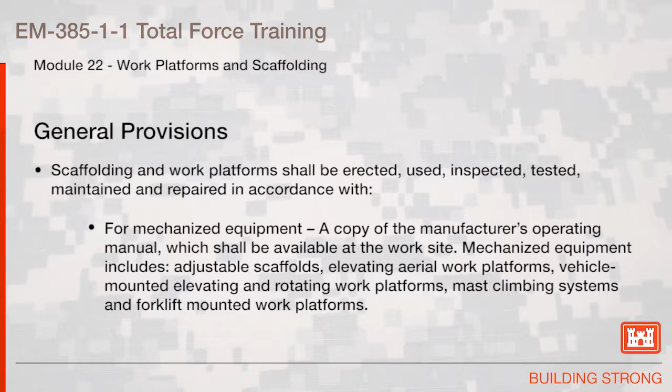The references for this section are EM 385-1-1, Section 22, OSHA 29 CFR 1926.450, Subpart L, UFGS 013526, latest edition, and ANSI ASSE A10.8, 2011 edition.

What is a scaffold? It is an elevated temporary work platform. There are three basic types: supported scaffolds, platforms supported by rigid load-bearing members such as poles, legs, frames, and outriggers; suspended scaffolds, platforms suspended by ropes or other non-rigid overhead support; and aerial lifts such as cherry pickers or boom trucks.

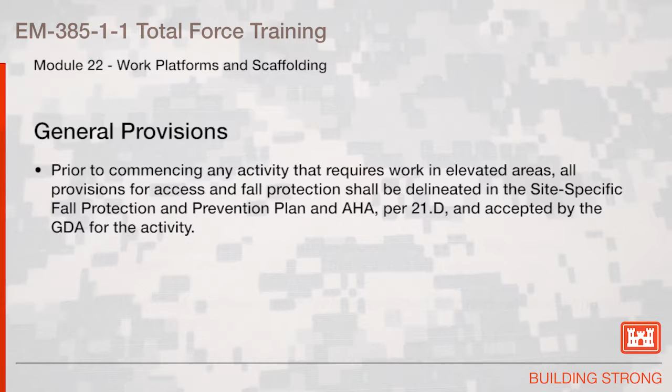General provisions. Prior to commencing any activity that requires work in elevated areas, all provisions for access and fall protection shall be delineated in the site-specific fall protection and prevention plan and the activity hazard analysis per Section 21D, and accepted by the GDA for the activity.

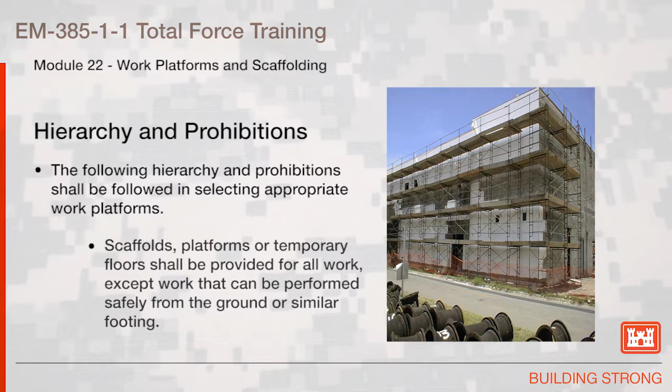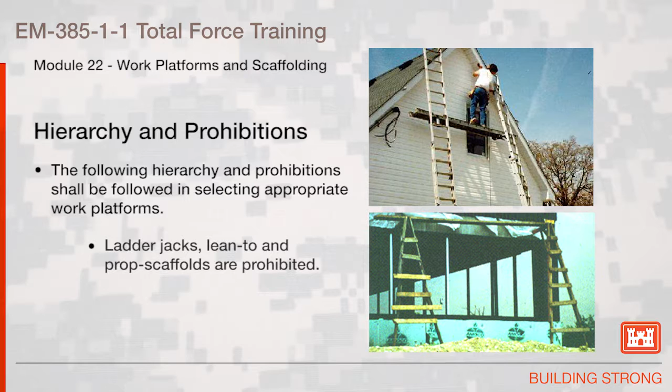Hierarchy and prohibitions. The following hierarchy and prohibitions shall be followed in selecting the appropriate work platforms. Scaffolds, platforms, or temporary floors shall be provided for all work except that which can be performed safely from the ground or similar footing. Ladders may be used as work platforms only when use of small hand tools or handling of light materials is involved. Ladder jacks, lean-to, and prop scaffolds are prohibited.

Emergency descent devices shall not be used as working platforms.

Activity hazard analysis. An AHA shall be prepared by the contractor performing the work and submitted to the GDA prior to erection. The AHA will address all of the following elements: site conditions, i.e. ground conditions, overhead utilities, etc.; identity of the specific type of scaffolding to be used; scaffold dimensions to include height, width, depth, and length; load calculation for the anticipated workload and wind loading; the name of the competent person for scaffolding; and the method of marking or barricading to be used per Section 22.B.18.

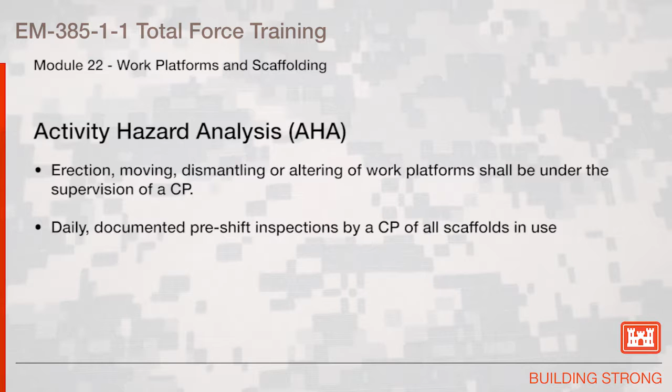The erection, moving, dismantling, or altering of work platforms shall be under the supervision of a competent person, with daily documented pre-shift inspections by a competent person of all scaffolds in use at that time. The competent person shall have a minimum of 8 hours scaffold training covering the specific types of scaffolding used, scaffold base, load calculations, and erection and dismantling.

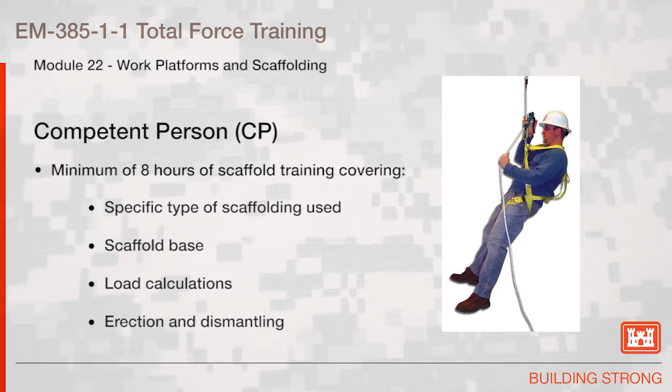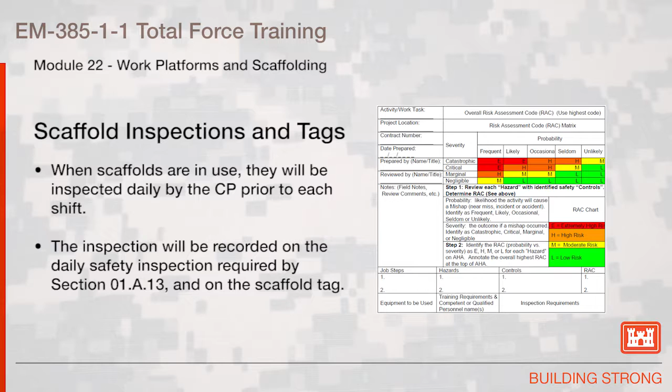Scaffold inspections and tags. When scaffolds are in use, they will be inspected daily by the competent person prior to each shift. The inspection will be recorded on the daily safety inspection required by Section 01A.13 and on the scaffold tag.

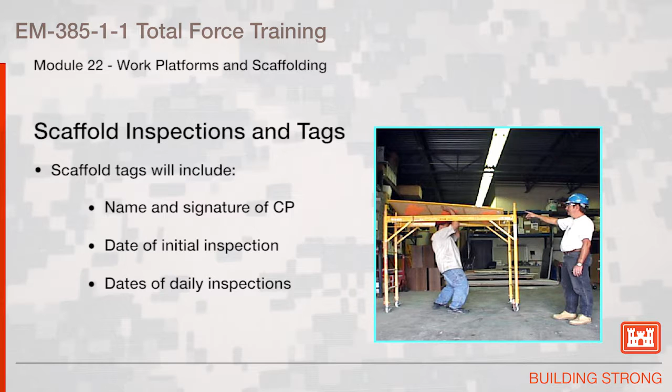Scaffold tags will include the name and signature of the competent person, date of the initial inspection, and dates of the daily inspections, and be visible, legible, and water resistant. They will include wording on whether the scaffold is complete and safe for use, or incomplete and either not ready for use or unsafe.

Scaffolding that has been hoisted after configuration or assembly will be re-inspected by a competent person, both before initial use and after each additional hoisting. This inspection will be documented on the scaffold inspection tag.

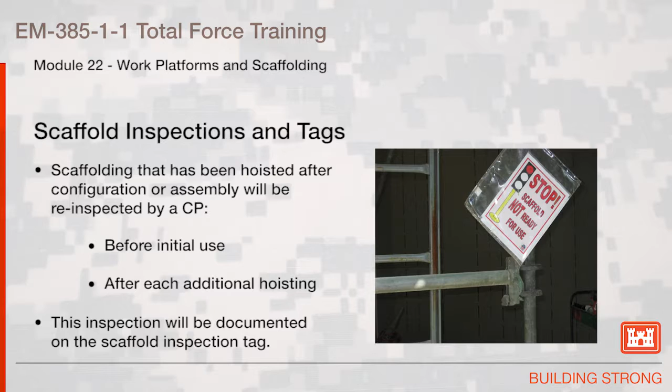Anyone involved in erecting, disassembling, moving, operating, using, repairing, maintaining, or inspecting a scaffold shall be trained by a competent person to recognize any hazards associated with the work in question. Proof of training shall be available upon request.

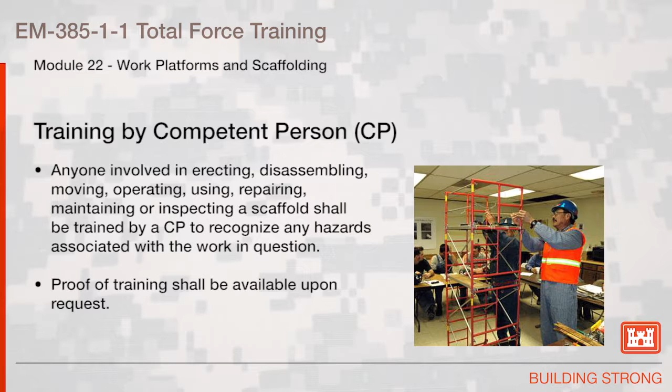Vehicle operations near scaffolds. When vehicles or mobile equipment are used near scaffolding, substantial stop logs or barricades shall be installed. The use of a ground guide is recommended for this equipment. However, if it is demonstrated that barricades are not feasible or are not required based on distance, a ground guide shall be used. Ground guides will not be exposed to potential falling objects. Hanging scaffolds are exempt unless the competent person determines that vehicles and mobile equipment could pose a hazard to safe operation.

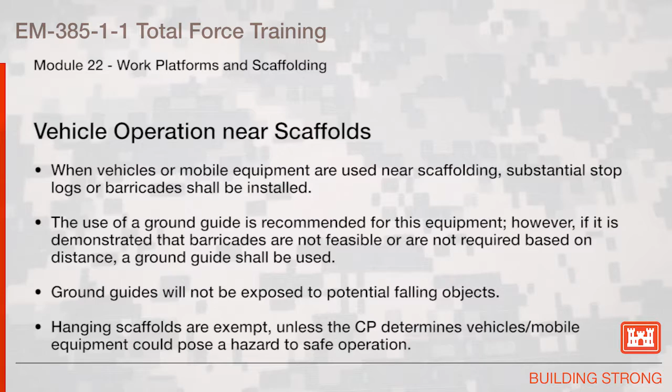Fall protection for erectors and dismantlers of scaffold. For workers erecting and dismantling scaffolds, an evaluation shall be conducted by a competent person for fall protection to determine the feasibility and safety of providing fall protection. If fall protection is not feasible, an AHA detailing a rationale for infeasibility of use of fall protection shall be submitted and accepted by the GDA.

Clearances. Work platforms shall not be erected or used in the immediate vicinity of power lines or electrical conductors until such are insulated, de-energized, or otherwise rendered safe against accidental contact.

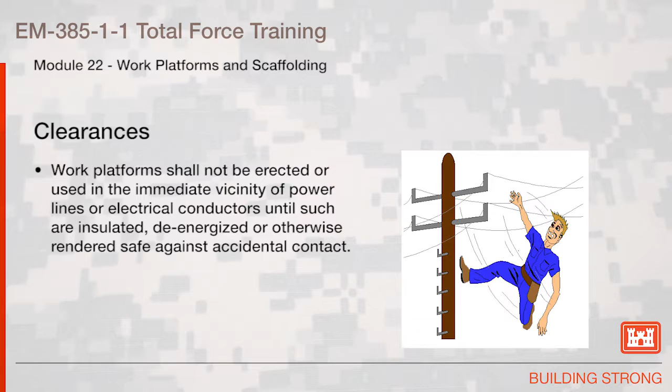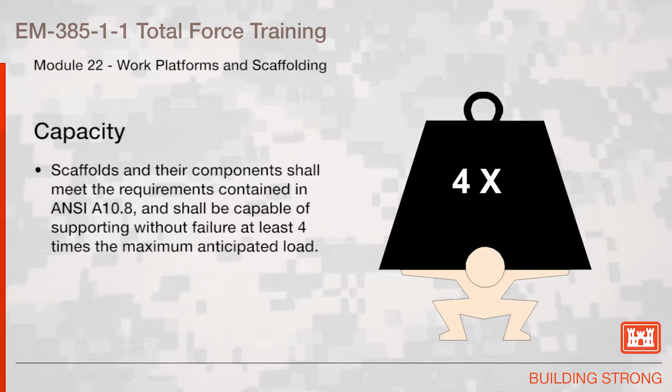Capacity. Scaffolds and their components shall meet the requirements contained in ANSI A10.8 and be capable of supporting without failure at least 4 times the maximum anticipated load. Direct connections to roofs and floors and counterweights used to balance adjustable suspension scaffolds shall be capable of resisting at least 4 times the tipping moment imposed by the scaffold operating at the rated load of the hoist, or 1.5 times minimum the tipping moment imposed by the scaffold operating at the stall load of the hoist, whichever is greater.

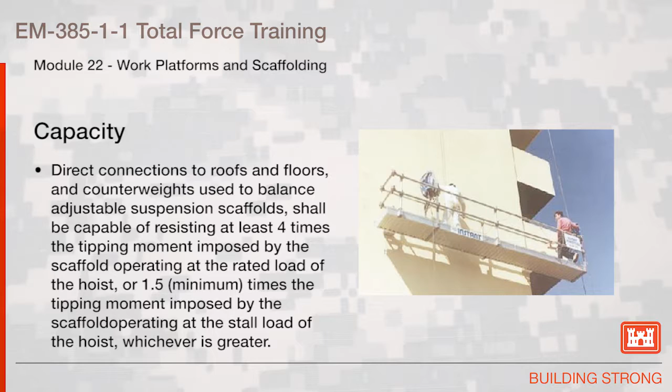Design. Factory fabricated scaffolds and components shall be designed and fabricated in accordance with the applicable ANSI standard. When there is a conflict between the ANSI standard and this manual concerning the design or fabrication of factory fabricated scaffolds, the ANSI standard shall prevail.

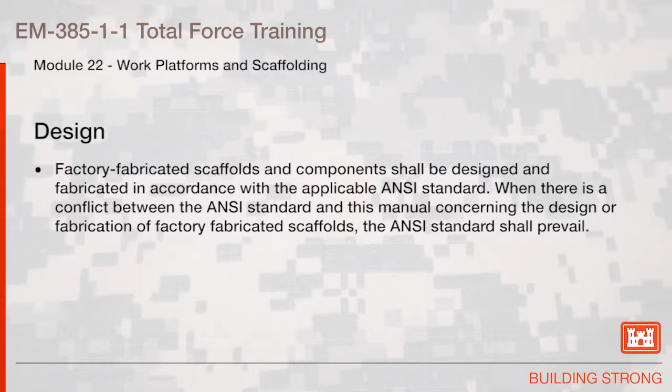When scaffolds are wrapped with tarps, poly enclosures, or similar materials, wind calculations will be calculated by a qualified person to determine the strength and placement of the ties. When scaffolds are to be partially or fully enclosed, a qualified person shall verify the adequacy of the number, the placement, and the strength of ties attaching the scaffold to the structure, taking into consideration wind loads and weather.

Supports. Supporting members and foundations shall be of sufficient size and strength to safely distribute loading. They shall be placed on a firm, smooth foundation that will prevent lateral displacement.

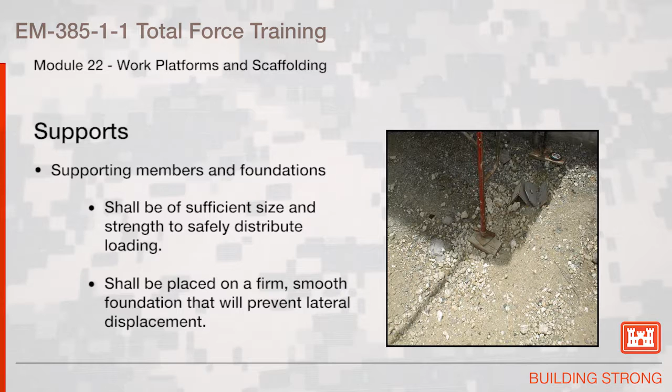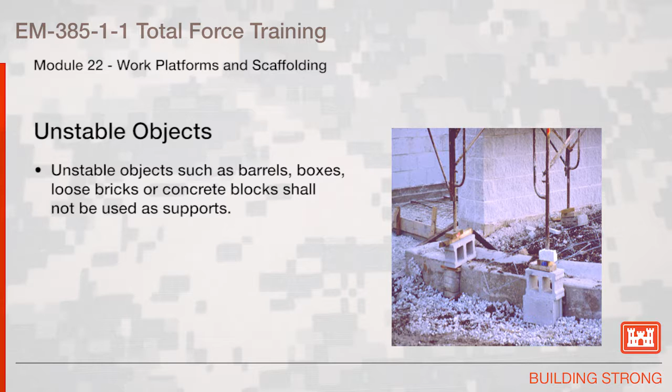Unstable objects. Unstable objects such as barrels, boxes, loose bricks, or concrete blocks shall not be used as supports.

Plumb and braced. Vertical members, i.e. poles, legs, or uprights, shall be plumb and securely braced to prevent swaying or displacement. Scaffolds shall be plumb and level unless designed by a registered professional engineer to contour as the structure does.

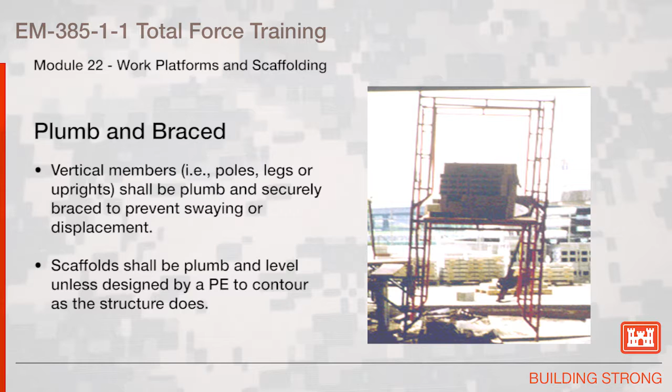Base supports. Scaffolds, other than suspended scaffolds, shall bear on base plates upon mud sills or other adequate foundation.

Planking. Working levels of work platforms shall be fully planked or decked.

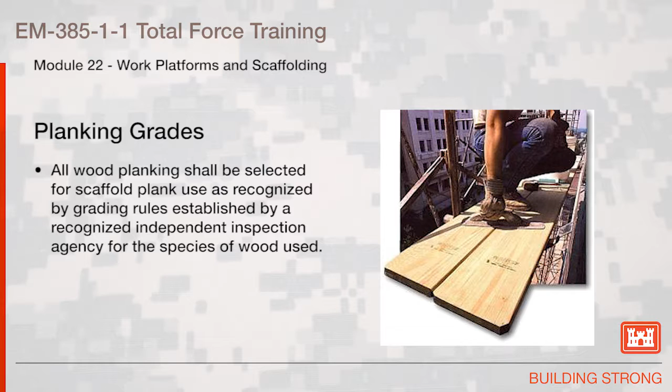Planking grades. All wood planking shall be selected for scaffold plank use as recognized by grading rules established by a recognized independent inspection agency for the species of wood used. Planking. Fabricated planks and platforms may be used in lieu of solid sawn wood planks. Maximum spans for such units shall be as recommended by the manufacturer.

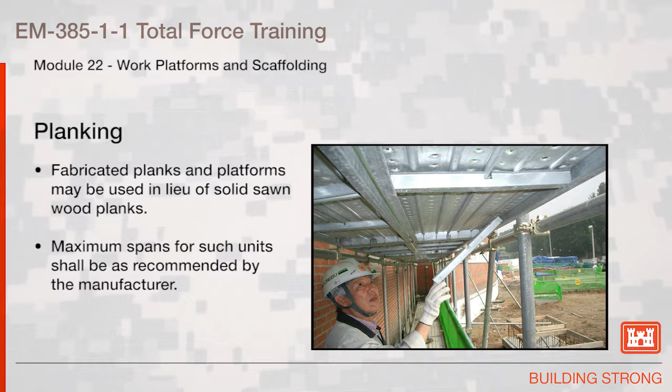Planking shall be secured to prevent loosening, tipping, or displacement, and supported or braced to prevent excessive spring or deflection.

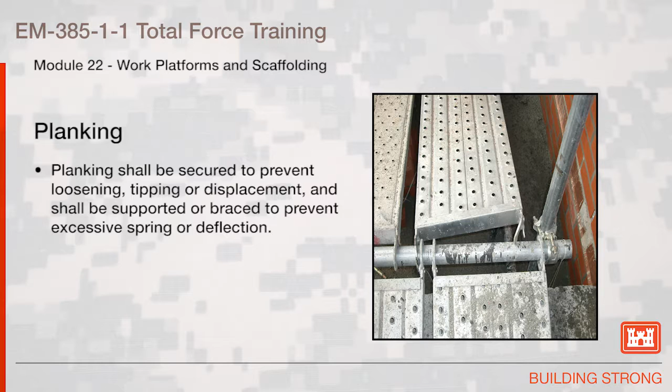Planking overlaps. When planking is lapped in a long run, each plank shall lap its supports by at least 12 inches. Scaffold planks shall extend over their end supports not less than 6 inches unless the planking is manufactured with restraining hooks or equivalent means of preventing movement, nor more than 12 inches.

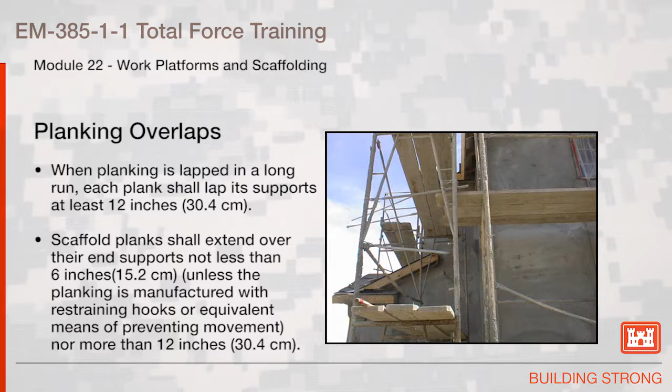Securing platforms. Work surfaces shall be properly lapped or securely fastened to the scaffold.

Platform distances. The front edge of all platforms shall not be more than 14 inches from the face of the work unless guardrail systems are erected along the front edge and/or personal fall arrest systems are used. The maximum distance from the face for plastering and lathing operations is 18 inches.

Access. An access ladder or equivalent safe access shall be provided. Where a built-in ladder is part of a scaffolding system, it shall conform to the requirements for ladders.

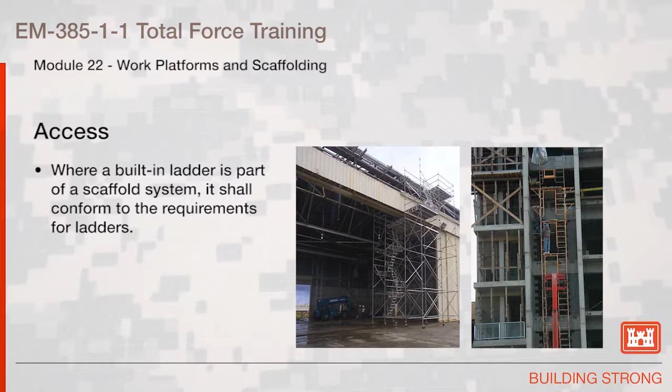Climbing on braces. Climbing of braces shall be prohibited.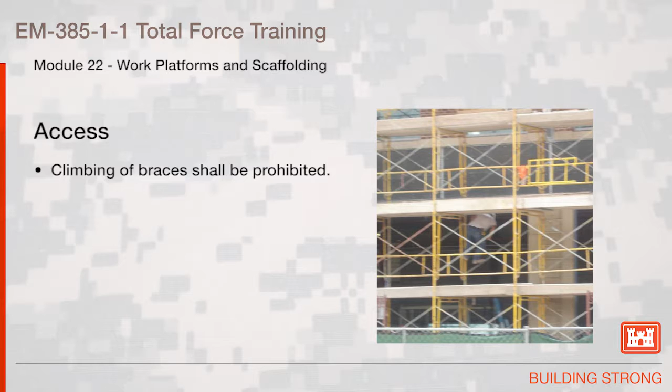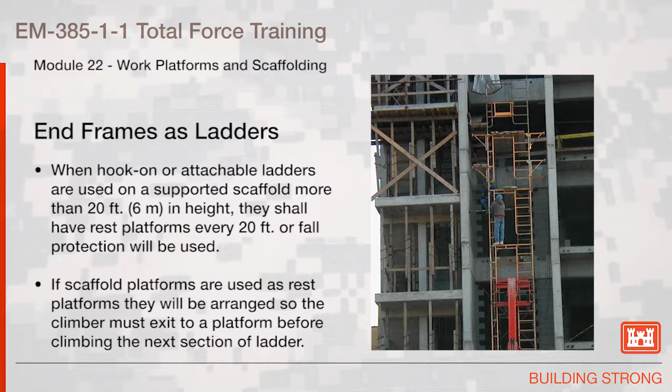End frames used as ladders. When hook-on or attachable ladders are used on a supported scaffold more than 20 feet in height, they shall have rest platforms every 20 feet or fall protection will be used. If scaffold platforms are used as rest platforms, they will be arranged so that the climber must exit to a platform before climbing the next section of the ladder. When end frames are used for access, they will conform to the ladder standard and not exceed 20 feet without fall protection.

Access gates. Ladder access points shall be protected by an inward swinging gate or chain guard.

Other authorized scaffolds. The use of the following types of scaffolding are permitted if they are designed and constructed in accordance with ANSI A10.8.

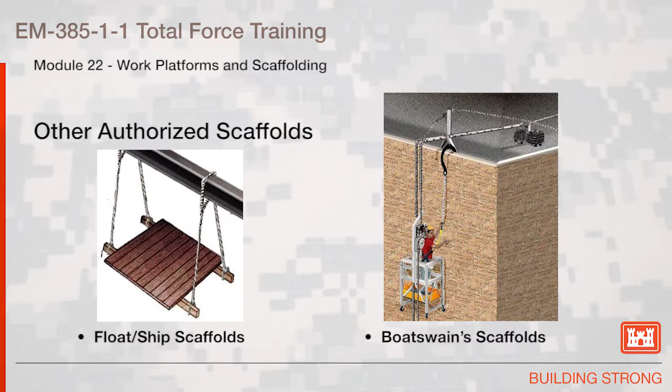Illustrated here is a float or ship scaffold and a boatswain's scaffold, window jack scaffolds, carpenter's bracket scaffolds, and form scaffolds.

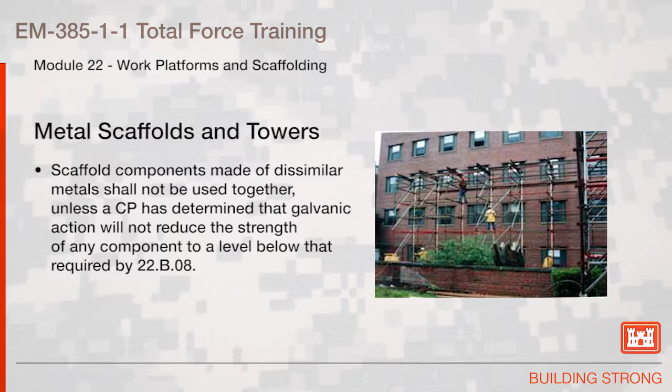Metal scaffolds and towers: scaffold components made of dissimilar metals shall not be used together unless a competent person has determined that the galvanic action will not reduce the strength of any component to a level below that required by section 22B.08.

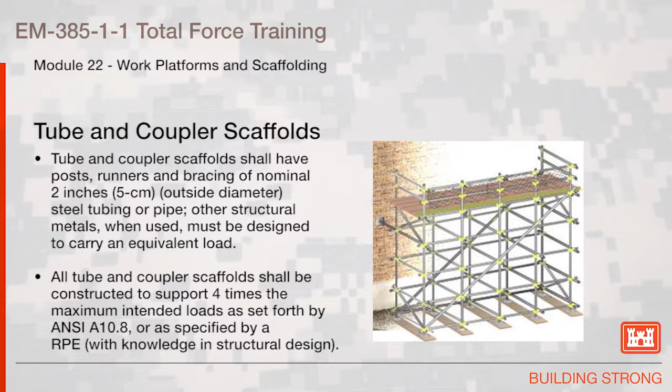Tube and coupler scaffolds shall have posts, runners, and bracing of outside nominal 2-inch outside diameter steel tubing or pipe. Other structural metals, when used, must be designed to carry an equivalent load. All tube and coupler scaffolds shall be constructed to support 4 times the maximum intended loads as set forth by ANSI A10.8, or as specified by a registered professional engineer with knowledge in structural design.

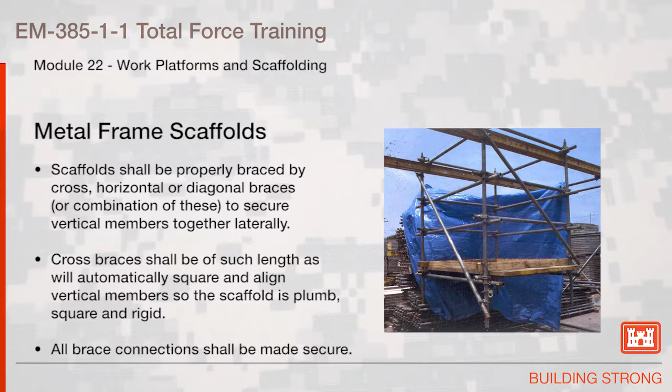Metal frame scaffolds shall be properly braced by cross, horizontal, or diagonal braces, or a combination of these, to secure vertical members together laterally. Cross braces shall be of such length that they automatically square and align vertical members so the scaffold is plumb, square, and rigid. All brace connections shall be made secure.

Frames shall be placed one on top of the other with coupling or stacking pins to provide vertical alignment of the legs. Where uplift may occur, panels shall be locked together vertically by pins or other equivalent suitable means.

Manually propelled mobile scaffolds include mobile work stands such as Baker scaffolds. All wheels and casters on rolling scaffolds shall have a positive locking device securely fastened to the scaffold to prevent accidental movement. All casters and wheels shall be locked when the scaffold is occupied.

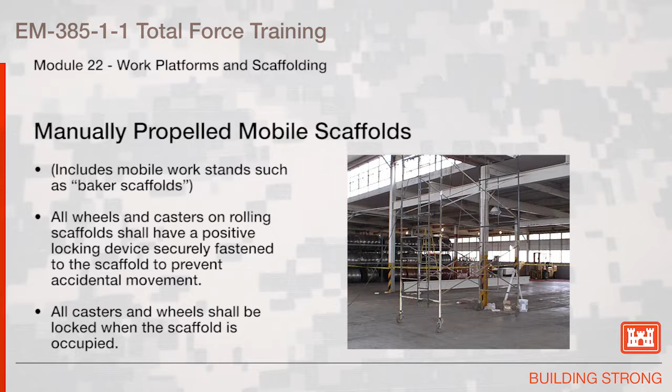Freestanding mobile scaffold working platform heights shall not exceed 3 times the smallest base dimension. Rolling scaffolds shall be used only on firm, level, and clean surfaces.

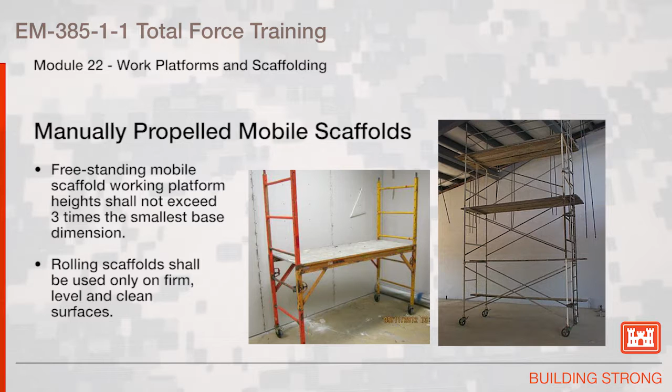Wood pole scaffolds are rarely seen. Refer to 29 CFR 1926.452A for the requirements for wood pole scaffolds.

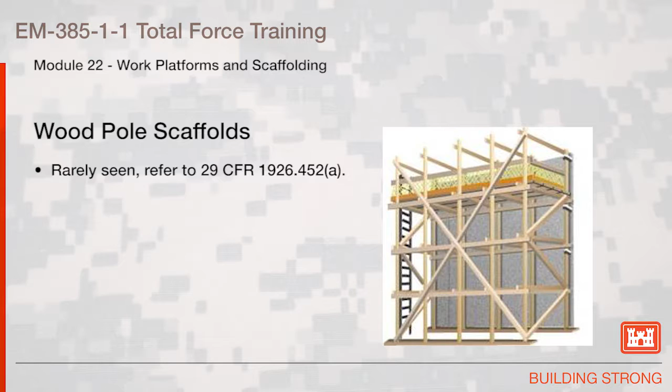Suspended scaffolds are scaffolds or work platforms that are suspended from anchorage points by hoists that allow the scaffold to move up and down as needed for the work to be performed. Suspended scaffolds shall be designed, constructed, operated, inspected, tested, and maintained as specified in the operating manual for the device.

Suspended scaffold inspection: before the scaffold is used, direct connections shall be evaluated by a competent person who shall confirm, based on the evaluation, that the supporting surfaces are capable of supporting the loads imposed. Each hoist shall be inspected by a competent person before use, after every installation and re-rigging, in accordance with the manufacturer's specifications. A trial operation will be done by the operator alone after every installation.

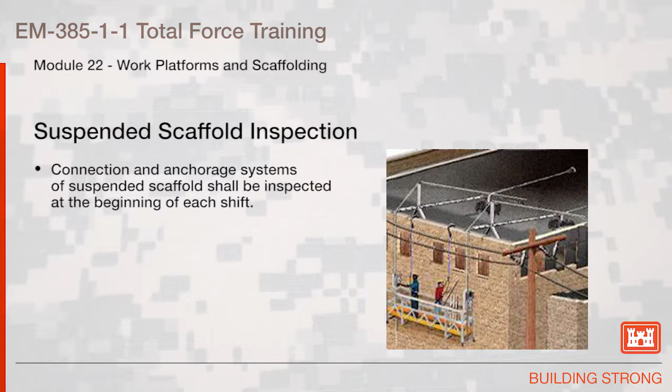Connection and anchorage systems of suspended scaffolds shall be inspected at the beginning of each shift. Only personnel trained in the use of suspended work platforms shall be authorized to operate it.

Anyone involved in erecting, disassembling, moving, operating, using, repairing, maintaining, or inspecting a suspended scaffold shall be trained by a competent person to recognize any hazards associated with the work in question. Proof of training shall be maintained on-site and made available to the GDA upon request.

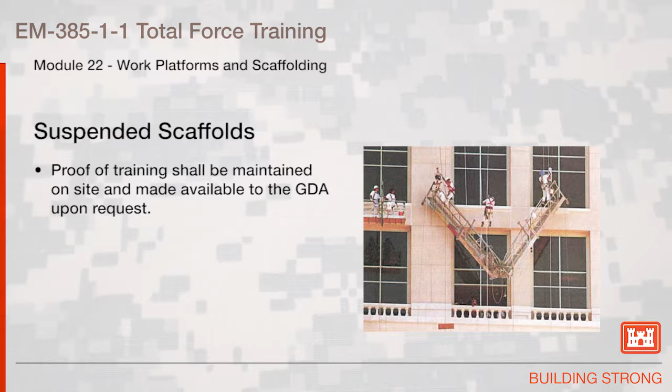2-point suspension scaffolds: 2-point suspension scaffold platforms shall be not less than 20 inches or more than 36 inches wide.

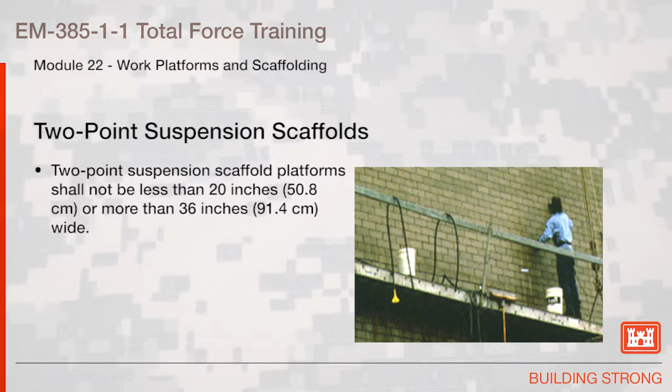A hanging scaffold is a scaffold work platform that is hung from a location, such as a wall or lock gate, for work to be performed, and that remains stationary until it is then repositioned with a crane or hoisting device. Hanging scaffolds shall be designed by a registered professional engineer competent in structural design.

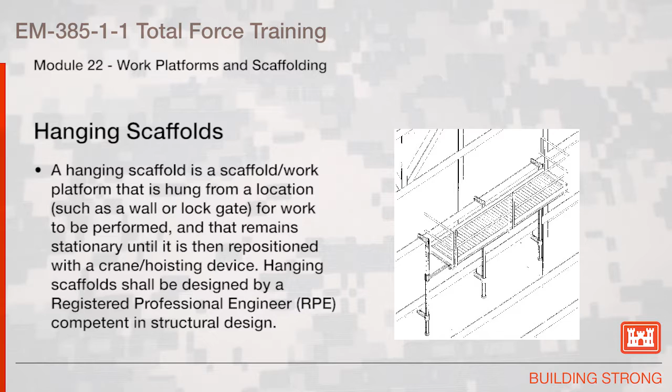Form and carpenter bracket scaffolds: a guardrail or other form of fall protection is required for all open edges when a fall of 6 feet or greater exists, or when other hazards exist below the platform.

Clip-on or hook-over brackets may be used on form work, provided the form walers are bolted to the form or secured by snap ties or tie bolts extending through the form and securely anchored. In addition, carpenter bracket scaffolds may be attached by a bolt extending through to the opposite side of the structural wall, a metal stud attachment device, welding, or hooking over a secured structural supporting member.

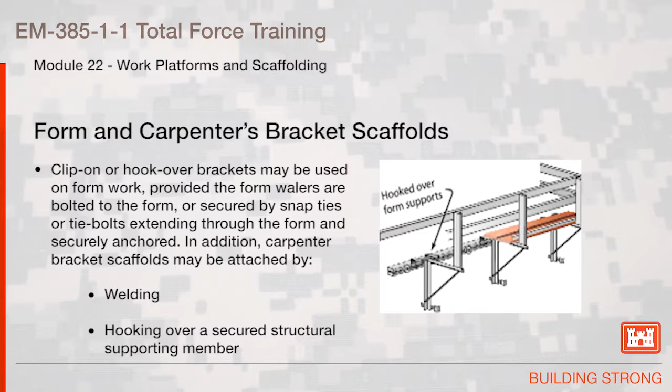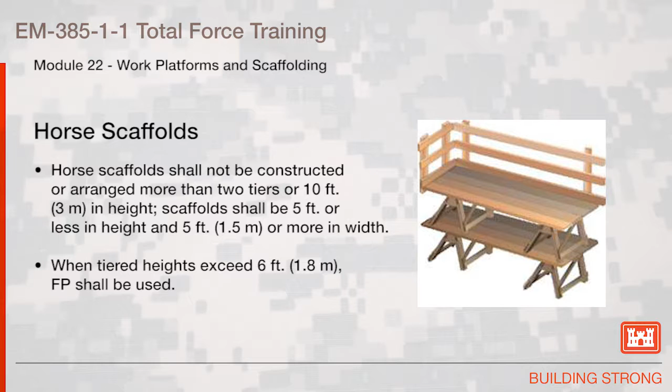Horse scaffolds shall not be constructed or arranged more than 2 tiers or 10 feet in height. Scaffolds shall be 5 feet or less in height and 5 feet or more in width. When tiered height exceeds 6 feet, fall protection shall be used.

Pump jack scaffolds shall be designed for a minimum working load of 500 pounds and not more than 2 workers shall be allowed on the scaffold at any one time. Pump jack brackets, braces, and accessories shall be fabricated from metal plates and angles and installed in accordance with the manufacturer's recommendations. Wood poles shall not exceed 30 feet in height, or metal poles shall not exceed 50 feet in height.

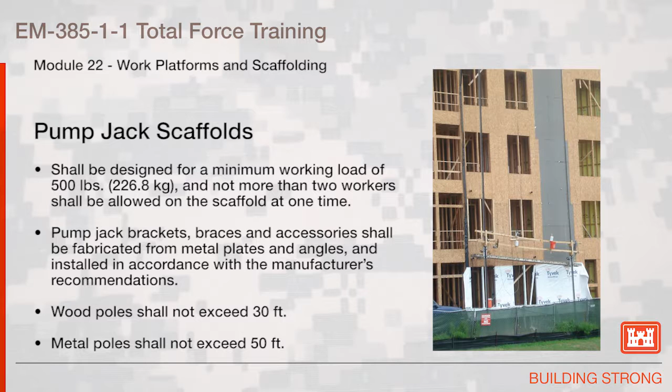Adjustable scaffolds shall be designed and constructed in accordance with ANSI/SIA A10.8.

Crane load handling equipment supported personnel work platforms, see section 16.T. Elevated aerial work platforms or AWPs.

All elevating aerial work platforms shall be designed and constructed in accordance with either ANSI SIA A92.3, ANSI SIA A92.5, and ANSI SIA A92.6 as appropriate.

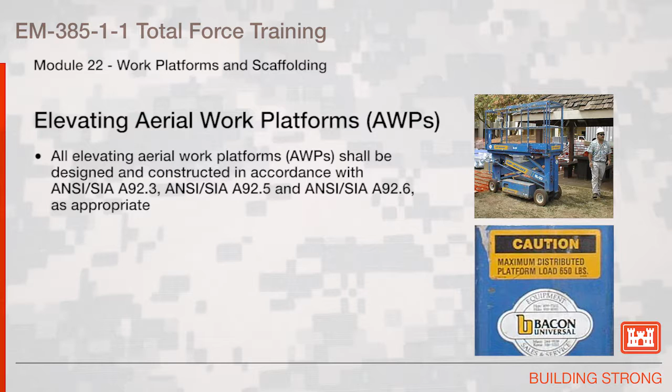Elevated aerial work platforms shall be operated, inspected, and maintained per the operating manual. AWPs shall comply with the requirements of this section and Section 18.G. Records of inspections conducted while the unit is at the worksite shall be maintained at the worksite.

Height to base ratio of the scaffold during movement is 2:1 or less per the manufacturer's instructions. All elevating aerial work platforms shall have the manufacturer's operating manual readily available on the equipment.

Aerial work platforms will not be operated unless the access door or chains are secured in the closed position. Fall protection shall be used in accordance with Section 21.K of this manual, and climbing of the rails is prohibited.

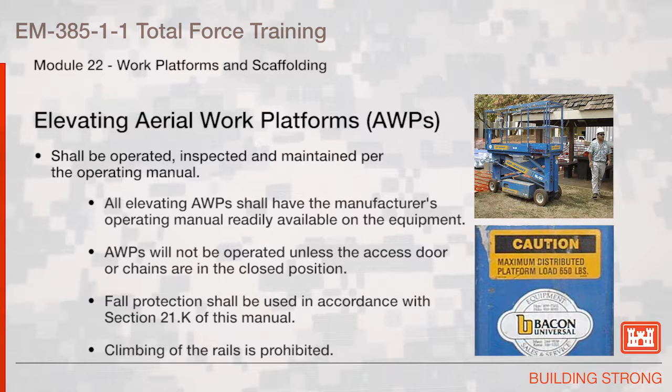All aerial work platform operators shall have training that includes both general as well as equipment-specific familiarization before being allowed to operate this equipment. The training shall be documented.

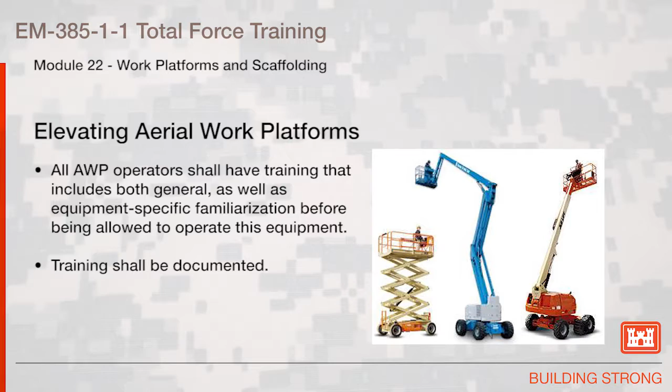Before operating the aerial work platform, the operator shall survey the work area for loose or soft ground, ditches, drop-offs or holes, bumps and floor obstructions, debris, overhead obstructions, ground and elevated energy sources, and other possible hazards.

Ensure the aerial work platform is on a firm, level surface. Ensure the aerial work platform is loaded in accordance with the manufacturer's specifications. Ensure that outriggers and/or stabilizers are used if required by the manufacturer.

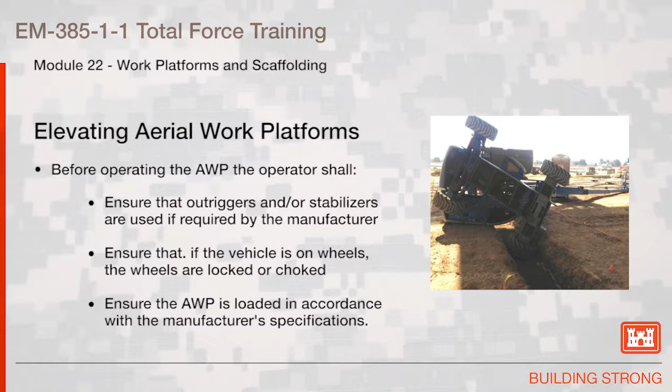Ensure that, if the vehicle is on wheels, the wheels are locked or chocked, and ensure that the fall restraint system is connected.

Aerial work platforms shall only be operated from the ground position in an emergency or rescue operation, for maintenance or when unoccupied.

Lift controls will be located below the guardrail height. When lift controls are not located below the guardrail height, an aftermarket guard will be installed.

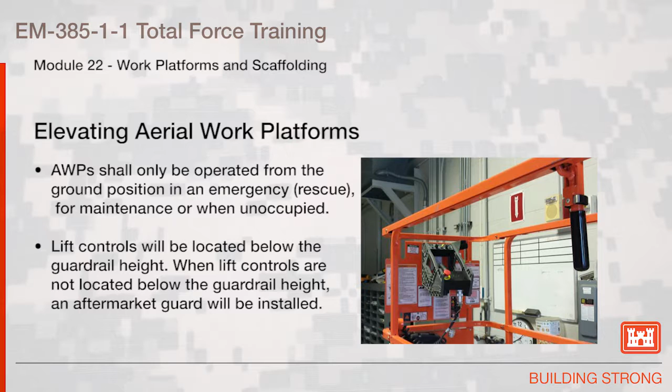Vehicle-mounted elevating and rotating work platforms. Only personnel trained in the use of the vehicle-mounted elevating and rotating work platform shall be authorized to operate it.

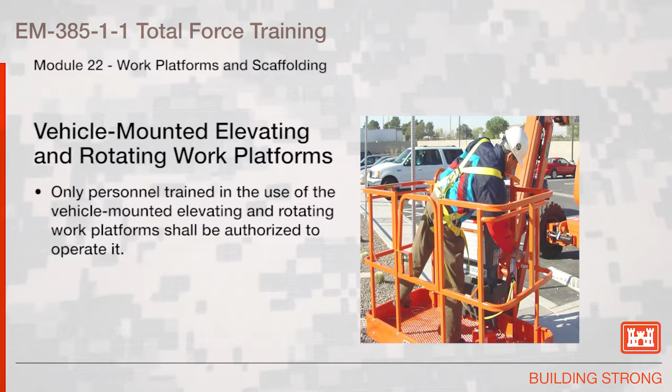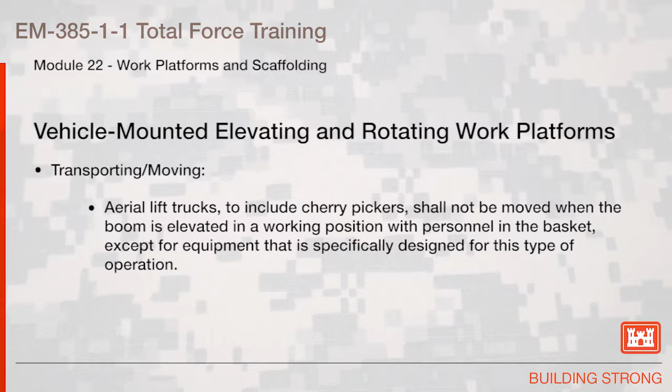Transporting and moving of vehicle-mounted elevated and rotating work platforms. Aerial lift trucks, to include cherry pickers, shall not be moved when the boom is elevated in a working position with personnel in the basket, except for equipment that is specifically designed for this type of operation.

When manufacturers allow mobile operation, the work site shall be inspected for untamped earth fills, i.e. soft ground, ditches, drop-offs and floor obstructions, debris, overhead obstructions and electrical conductors, weather conditions, and the presence of unauthorized persons.

Operating practices. The manufacturer's instruction for control station operation must be followed, for example, primary versus secondary or upper versus lower control stations.

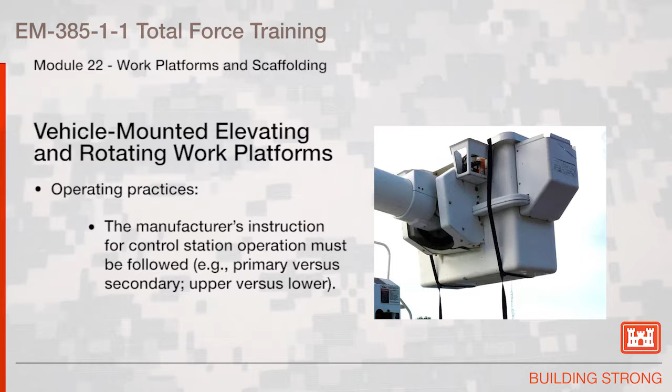Lift controls will be located below the guardrail height. When lift controls are not located below the guardrail height, an aftermarket guard will be installed.

Lower level controls shall not be operated unless permission has been obtained from the employee in the lift, except in the case of emergency. This practice shall be documented in the applicable activity hazard analysis.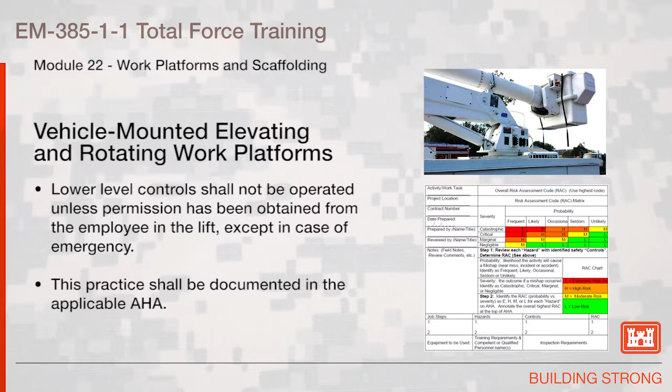Mast climbing work platforms shall be erected, used, inspected, tested, maintained, and repaired in accordance with ANSI A92.9 and the IPAF SAIA Safe Use Guidelines for mast climbing work platforms, and the manufacturer's recommendations as outlined in the operating manual.

A pre-use inspection will be performed prior to erecting the work platform according to the requirements set out in the IPAF SAIA and the Operator's Manual.

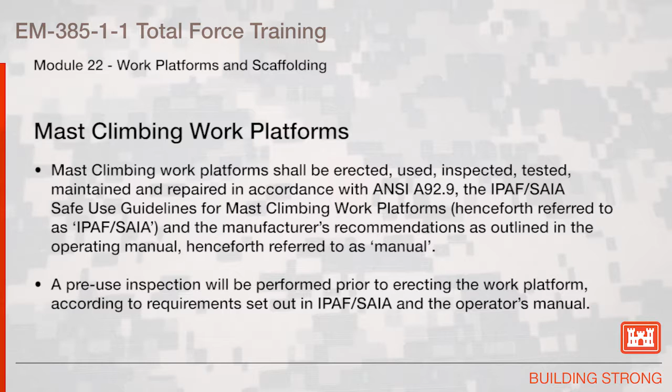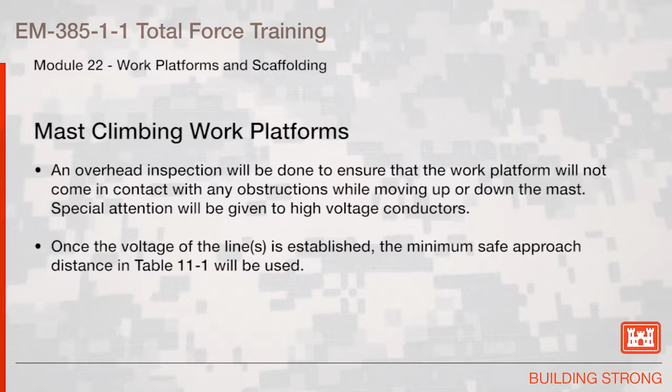An overhead inspection will be done to ensure that the work platform will not come in contact with any obstructions while moving up or down the mast. Special attention will be given to high voltage conductors. Once the voltage of the line is established, the minimum safe approach distance in Table 11-1 will be used.

Only designated trained users shall be designated to operate the mast climbing work platform. Training records shall be maintained for at least 3 years and maintained on site. All personnel on the platform shall be trained per section 22.N.15.

Climbing of braces and guardrails is prohibited. When access ladders, including masts designed as ladders, exceed 20 feet in height, positive fall protection shall be used.

All access gates shall either close automatically or be electronically interlocked to prevent operation of the work platform unless they are closed. Chains or ropes shall not be used as access gates.

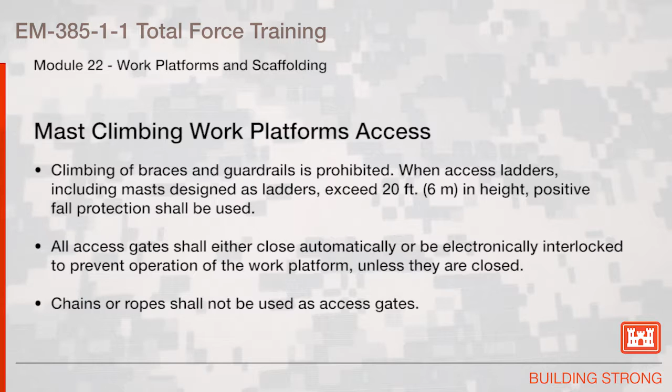Prior to use at elevations of 20 feet or more, an emergency egress plan will be developed to evacuate workers from a platform that gets caught in an elevated position 20 feet or more above the ground. If that plan includes descending the mast, all employees working on the platform will be provided fall arrest equipment and will be trained in its use.

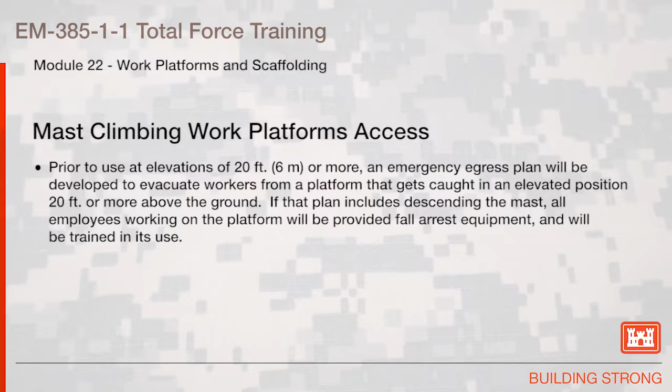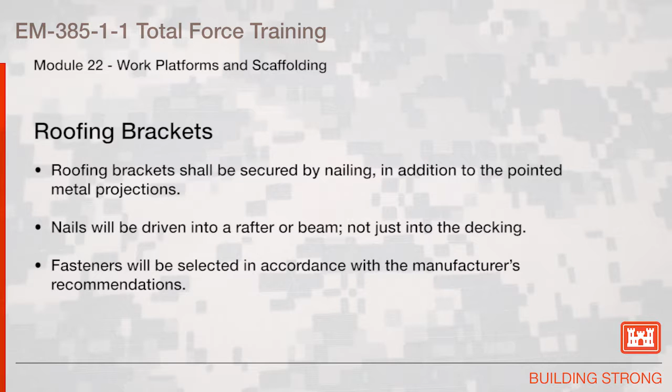Roofing brackets. Roofing brackets shall be secured by nailing in addition to the pointed metal projections. Nails will be driven into a rafter or beam, not just into the decking. Fasteners will be selected in accordance with the manufacturer's recommendations.

Turbine maintenance platforms, or TMPs. A TMP is a type of scaffold unique to hydropower operations and maintenance that incorporates aspects of both suspended scaffolds and hanging scaffolds. These TMPs are assembled in the draft tube below the turbine where they are physically attached to the structure. Some TMPs must be assembled below the turbine at the draft tube door level and raised into position, and may also be required to be close to the turbine blades such that the TMP must wrap around the turbine hub. This applies to vertical axis turbines where the TMP is assembled under the runner.

Note, this section does not apply to standard off-the-shelf applications of scaffolds designed and used in accordance with ANSI A.10.

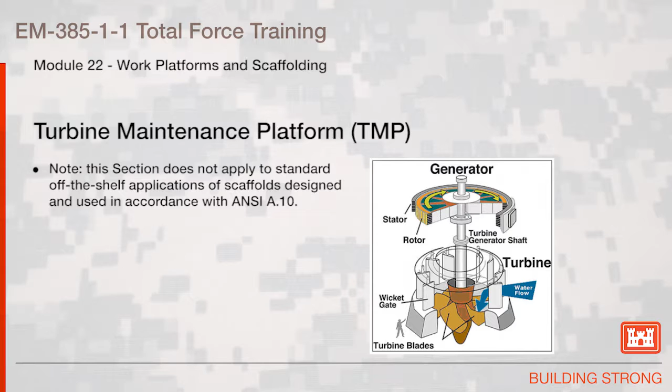Forklift or powered industrial truck mounted work platforms. Forklifts, powered industrial trucks, will not be used to support work platforms unless there is no other practical method. If a rough terrain forklift must be used, all the conditions in this section must be met. There are 22 additional requirements that must be met if using this type of equipment to lift personnel. Please refer to EM 385, Section 22.

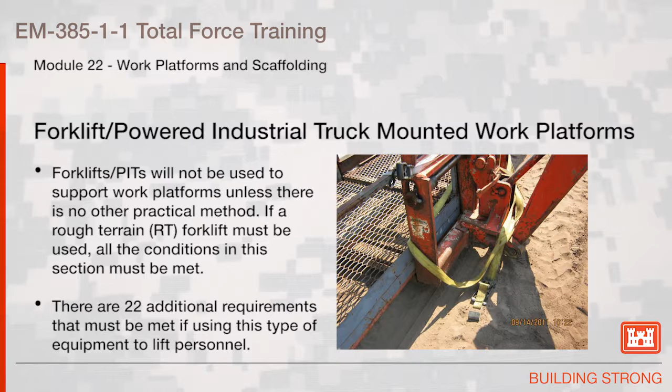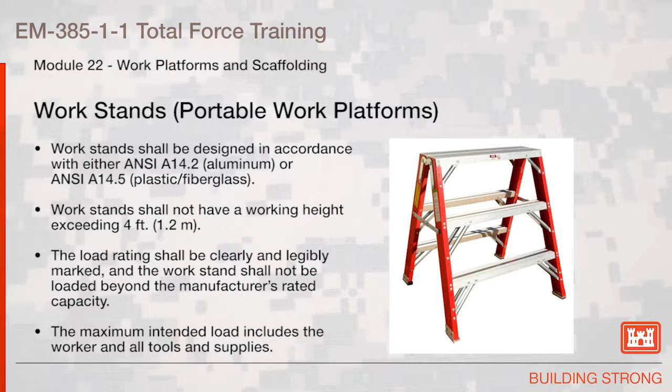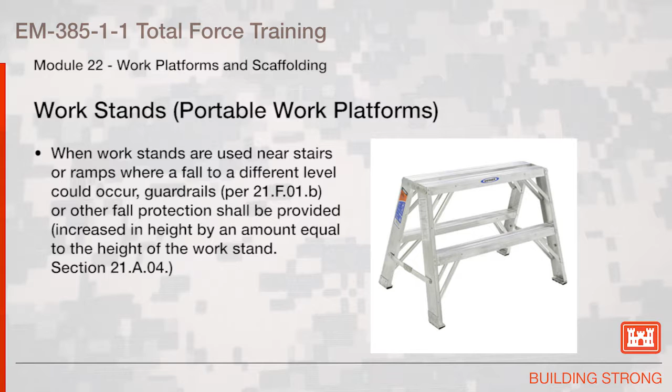Work stands shall be inspected for visible defects on a daily basis and shall be maintained with no structural damage. Job-built work stands are not allowed. Sawhorses shall not be used as work stands.

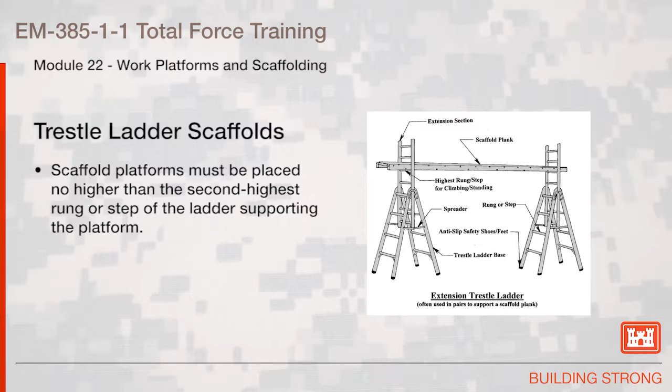Trestle ladder scaffolds. Scaffold platforms must be placed no higher than the second highest rung or step of the ladder supporting the platform. All ladders used in step, platform, and trestle ladder scaffolds must meet or exceed 29 CFR 1926 subpart X, except that job-made ladders are not permitted. They must be prevented from slipping by how they are placed, fastened, or equipped.

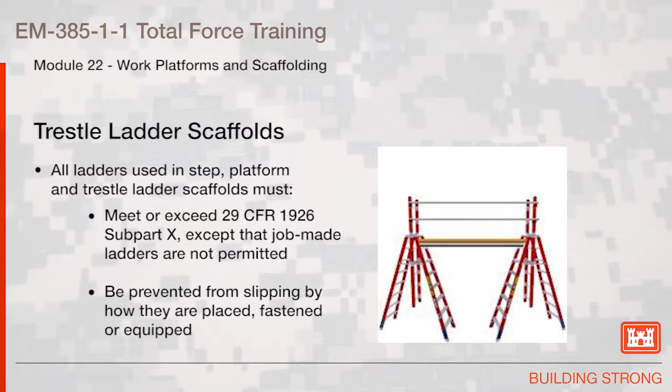In summary, remember to use appropriate scaffold construction methods, erect, move, or alter scaffolds properly, protect from falling objects or tools, ensure stable access, use a competent person, train on scaffold construction and the hazards involved with scaffolds, inspect the scaffold before each shift and after alterations, and determine the fall protection requirements.